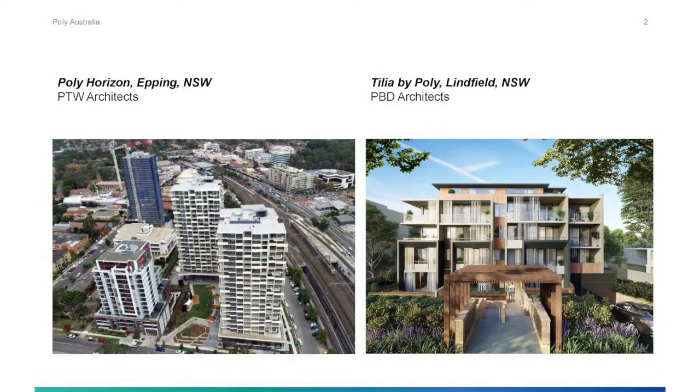Completed in Sydney, we've got a project at Epping and a project at Lindfield. Epping is complete, and Lindfield is currently under construction. We've also got several projects in Melbourne, one of which is the very exciting 1000 La Trobe Street, which is another commercial building that'll be built. It's in the planning process, along with Summit at Doncaster, and one of our completed projects, Claremont Manor in South Yarra, Melbourne. But globally, we have a lot of experience in commercial real estate.

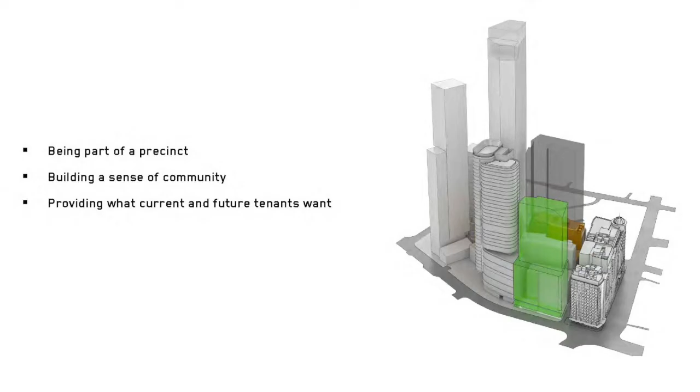By targeted workplace, we saw the building as being part of a precinct, an ever-changing part of the city with a multitude of commercial opportunities for clients to tap into. We saw this building as fitting into a community, but also providing a unique identity to the current tenants and to the future needs of this ever-changing, ever-adapting workplace and commercial structure we find ourselves in today.

Health and well-being we placed at the central core of our ideas. With that, we decided to move the core of the building from the reference scheme. That allowed us to put people near light, making people use the edge of the building, allowing for light and views out to the city, and really allowing the majority of your day to be spent near a window, which is a very simple move.

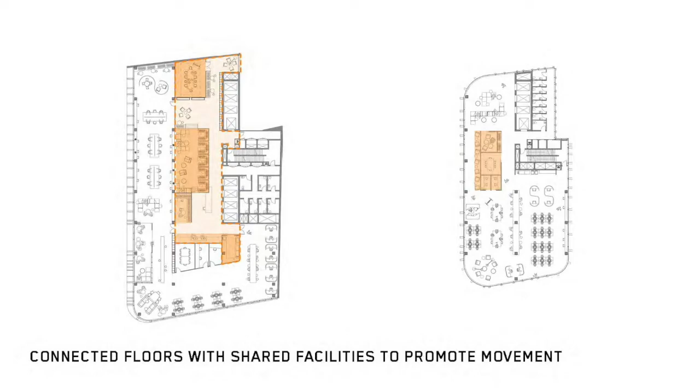That also meant that within the central part of the floor plate, you were able to provide something that interconnected floors and provided a space so it can engage with different levels and different meeting spaces. This allowed the building to be used by one tenant and have interdependency, or it can be used by a multitude of tenants, allowing individual people to use shared spaces, but then also to all come together as one organization into common spaces.

We wanted to provide all of the tenants with unique opportunities to use external zones. So within the carving of the form and the landscape elements, we provided a variety of environments so that if you were on a specific floor plate, you can use an external space adjacent to your space, but you can also go to spaces further up the tower.

Rather than providing cut and paste floor slabs, at the podium we've got winter gardens, which are predominantly owned by the people within those spaces. Then you've got levels 9, 10, and 11, which are external larger spaces that allow the internal community to use and adopt, but also allow a breakdown of scale to offer to the city.

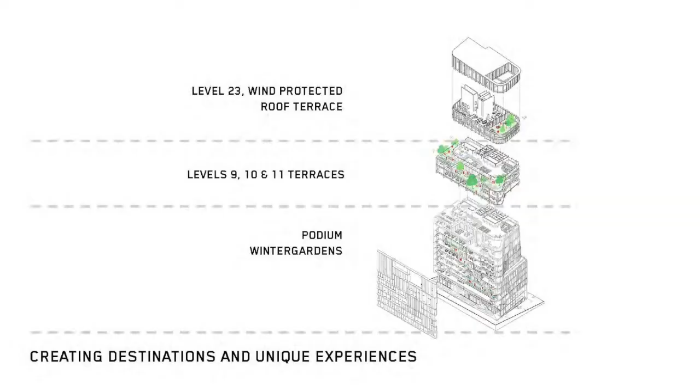We also provided a rooftop garden, and the whole idea behind all of these clusters of spaces was allowing unique experiences, so you'd hope the building would be used in a way where you can travel up the building and go to a destination, creating a variety of community neighborhoods and destination planning.

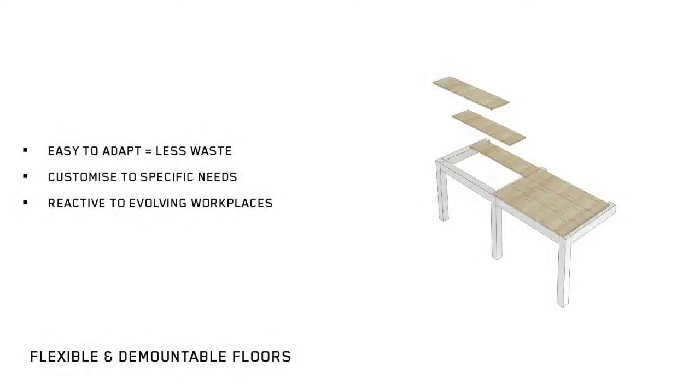We felt that the future commercial market is evolving and is not in place yet. We don't know what's going to happen in the future, so something that looks easy to adapt and produces less waste, so you're able to easily remove parts of floor plates to adapt your space over time and allow for future tenant needs.

It also meant a very practical consideration, so we were talking with the engineers early on. We had two rail lines under the site, and we said, how can we get the building as light as possible, to hopefully, once we get into more detailed research, keep that lightness over the tunnels and make it easier to construct. So we had concrete up until the second level, and then a timber frame structure up to the top, which I think was actually one of the downfalls of the scheme.

We made it an early decision to say we're going to do that, we're going to go for it. But then, in retrospect, maybe not the right idea.

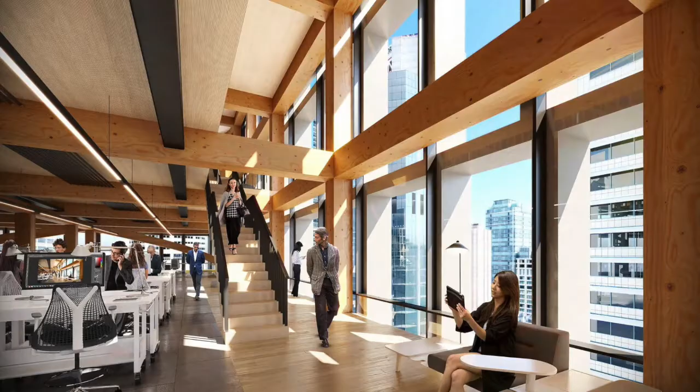And this is one of the spaces which shows a glulam structure and a very definite structural solution.

Traditionally, towers have been working as walls and voids of spaces in urban fabric, disconnected from the urban activity. So what we decided to do was go in an unconventional way, and try to humanize the scale and continue the urban flow in our proposal.

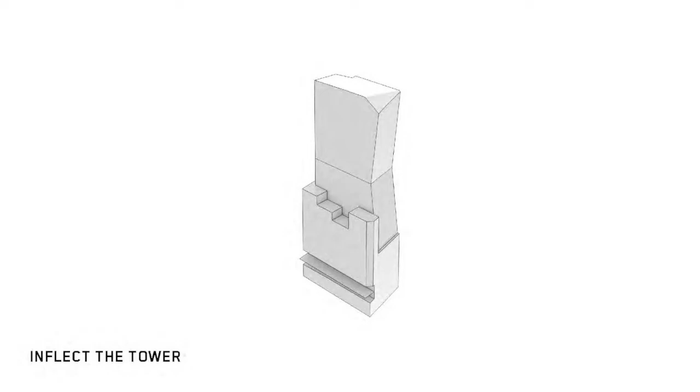To do that, we started breaking down the scale by introducing pockets of green spaces while keeping the existing street datums, both on Grosvenor Street and George Street, and introduced an inflection in the geometry of the tower as a waist that opens up the street to the solar access and maximizes the daylight factor and sky view factor on the street.

And then, of course, responding to the legislative rules, like the solar access plane and height control, and finally smoothing it up with curved edges to bring back a bit of that familiar Sydney feeling that you get when you're walking around Circular Quay.

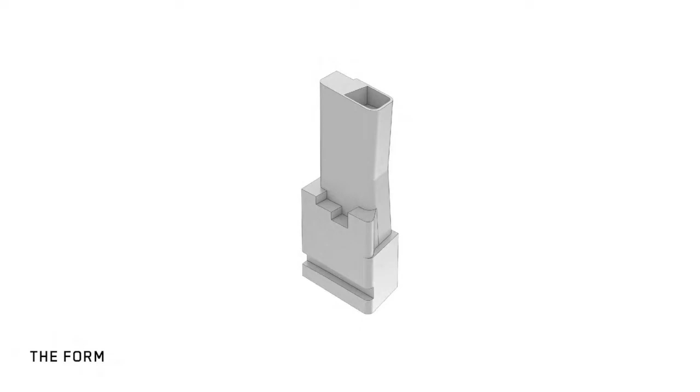This is the final geometry with its carved out bits of green spaces. This is the final proposal that, in our view, provides a boutique workplace that is connected, not disconnected from the urban activities on the street, connecting the workplaces with urban street activity through interstitial interactional zones that we introduced as green pockets.

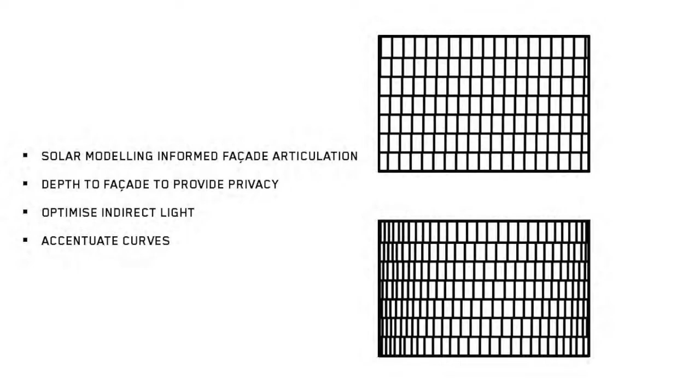Besides the geometry itself, the facade also responds and connects to the urban activity through the green pockets, and also responds to environmental factors by opening up in the middle and closing down on the edges to maximize the daylight factor on the workplace. With limited variations of depth for the fins, we respond to the direction of the solar.

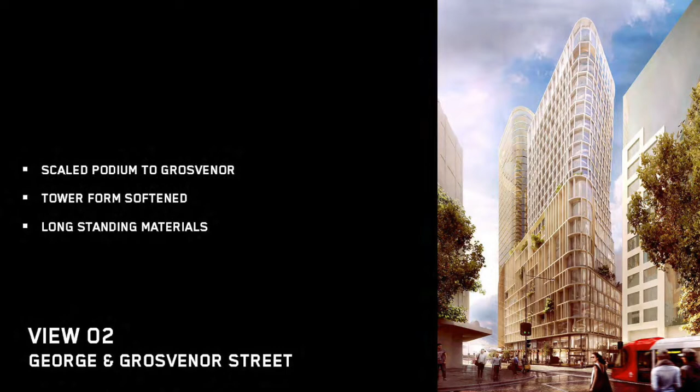Besides that, we thought it's a good idea to keep authentic Sydney materials, such as sandstone on the podium and GRC on the top. And as I mentioned before, the inflection in the tower opens up the view to the sky and also solar access at the ground level.

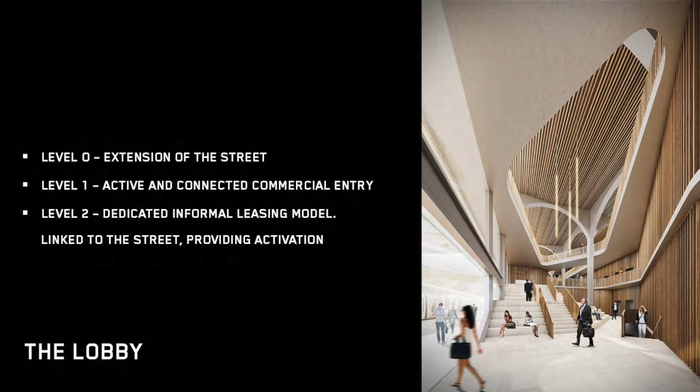You can see the green spaces breaking down the scale. There's a normal elevation, so when you get to the lobby, you don't face a conventional lift lobby with a bunch of lifts in front of you, but you start to interact with 3 levels of different activities, including retail on the ground, commercial entries on level 1, and informal co-working spaces on level 2. You can see a typical view from level 2 and interaction with the public activity on the ground.

That was our proposal, short and quick. I hope you guys liked it.

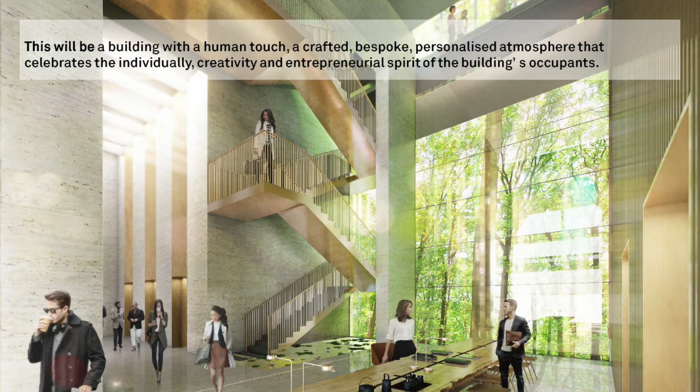We really wanted it to feel like it was operating as a fine hotel, and our proposal really sought to be an individualist in what we saw as a conforming office market, really tapping into a deep pool of tenants whose needs we felt are currently quite poorly met. It's elegant, sophisticated, and it delivers significant commercial and public benefit.

I'm going to take you through 3 key spatial moves that really underpin our proposal and unlock the environmental, commercial and design potential for the 210 George Street site. These 3 key moves are: locating the core to the north, shifting floor space high within the envelope, and setting the building back to the east and the south.

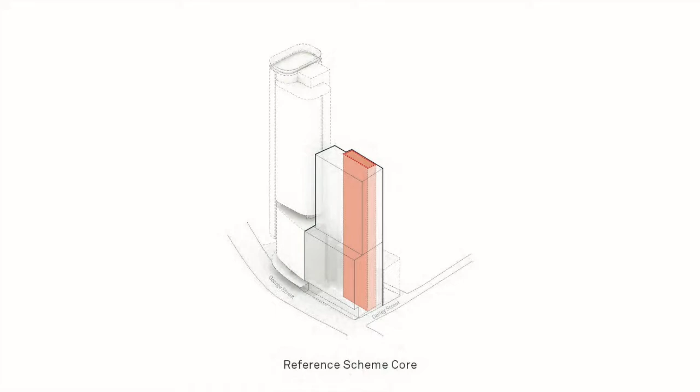For those not familiar, the reference scheme placed the core on the east. At Hassell we like to explore possibilities through our design process, and fundamental to a successful office building is a well-placed core and its impact on the ground plane. Through careful consideration, we moved the core to the north, as we saw significant benefits.

The first benefit is increased natural daylight. By moving the core to the north, we were able to free up 80% of the facade with glazing. That meant 100% of the workplace was within 12 metres of the facade, creating excellent natural daylight and a high quality space. Moving the core to the north also meant we could release expansive views from the main floor plate itself.

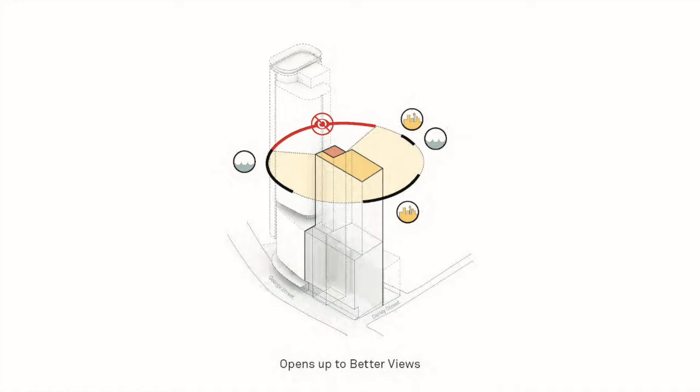With 200 George Street and Lendlease Circular Quay Towers in close proximity to the north, there was limited access to views. So from the floor plate itself, we were able to capture views to the west towards the Western Harbour and Barangaroo, to the south the city skyline, and to the east towards the Botanic Gardens.

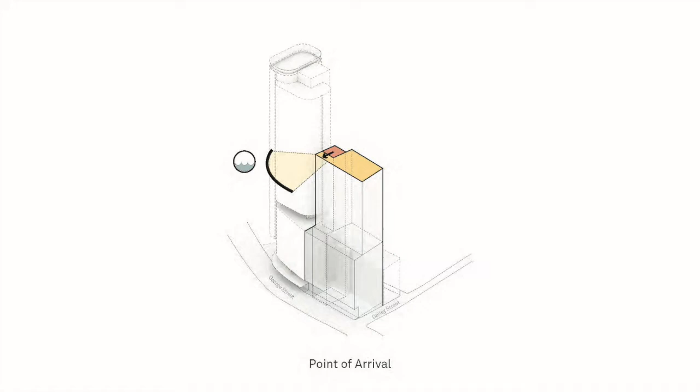The northern core also created the opportunity for a distinct point of arrival. Rather than the core being buried deep within the floor plate, we were able to place it close to the perimeter, meaning it benefits from good daylight and views upon arrival on a typical floor.

The distinct point of arrival also worked for us, as it didn't interrupt the main workspace itself. The main workspace remained regular, efficient and flexible, aimed to attract a diversity of tenants.

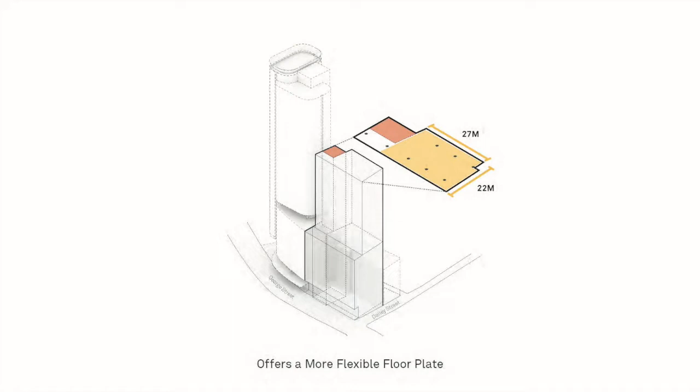Our second key and big move was to move floor space high within the envelope. We effectively narrowed the lower section of the building to the east between our site and 4 Dalley Street to create a gap.

This firstly pushed valuable lettable area high within the envelope, which we know is a great challenge with the City of Sydney competitions, to unlock the greatest potential out of the envelope. But for me, the biggest benefit was that it created incredible public benefit: a new laneway behind the site that connected directly into the APDG laneway network.

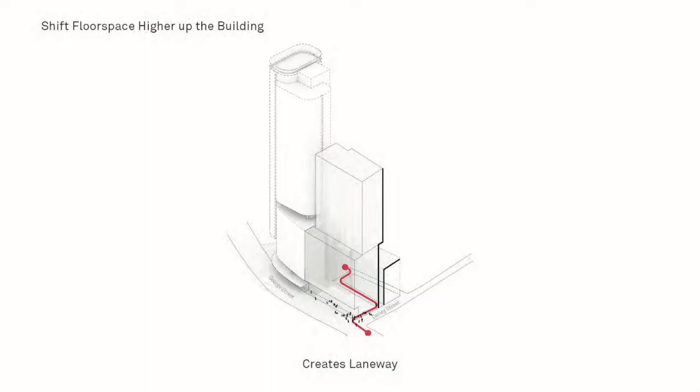It also opened opportunity for new retail and entertainment spaces at the lower levels, adding activation and cultural character to the precinct, as well as natural light to the lower levels of the podium, again creating a really high quality workspace.

Our third big move is to set the building back on the southern edge, to create a building with a strong presence, articulation and amenity.

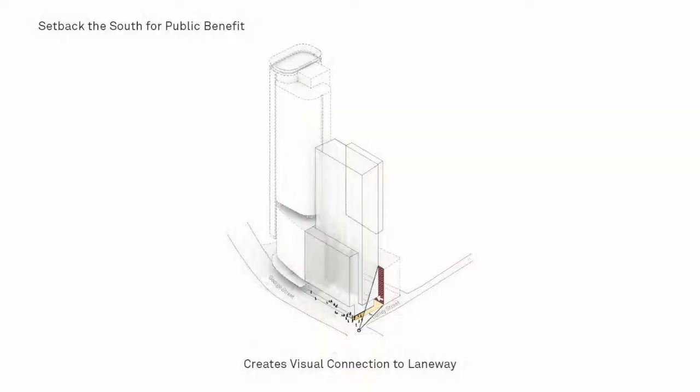It provided pedestrian amenity by widening the footpath for safety and activation. It also created stronger visual connections into the laneway, which is particularly important as we hark back to recognise what this area once was in early settlement: a tiny warren of laneways and courtyards.

I thought it would be really interesting to reinstate some of that. It also announces the APDG block from the south.

Formally, it emphasises the verticality of the tower as a very elegant and memorable form, without compromising the engagement with the ground plane.

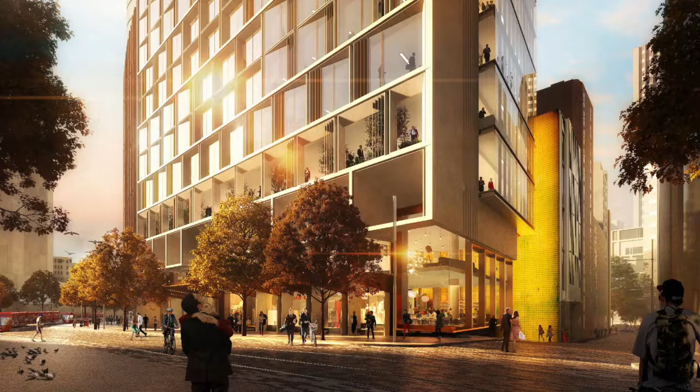So these 3 key moves - moving the core to the north, shifting floor space high within the envelope, and setting the building back to the east and south - were the key moves that unlock significant commercial and public benefit.

Historically and culturally, this is a place that has significant meaning for many hundreds of years. And it's a really exciting time in Sydney, particularly on George Street, which is undergoing rapid change to become Sydney's premier street, a pedestrian and light rail enabled boulevard.

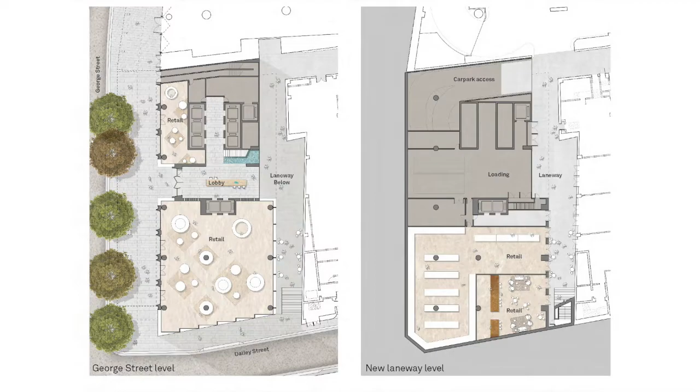For us, it was incredibly important to place the commercial lobby off George Street, to create a clear, identifiable address intrinsically located with its surroundings, rather than the reference scheme, which placed it on the corner with options to place it off Dalley Street.

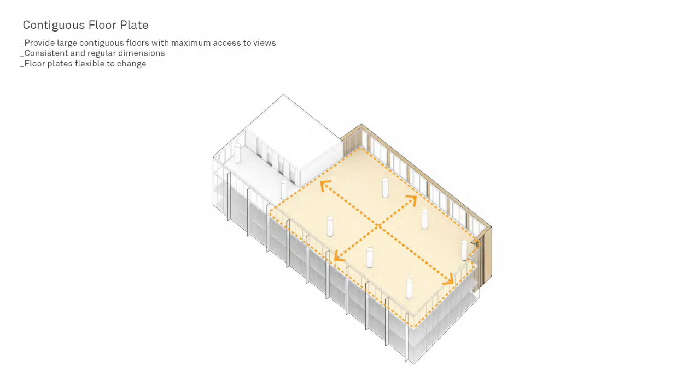As I mentioned, creating a high quality workplace was important. We created a really regular, efficient floor plate with an efficient structural solution. The columns were placed inboard to free up the perimeter, but they also allowed us to place voids either in the centre or on the perimeter to effectively connect multiple floors and create vertical villages.

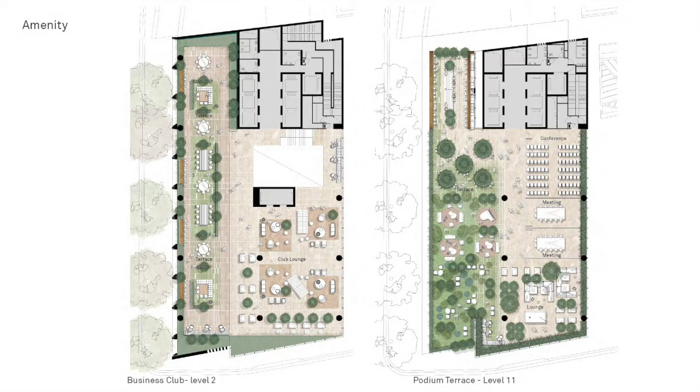As you can see from this render, it illustrates multiple floors connected on the perimeter and also experiencing great natural light and views. One of the most exciting parts of the scheme for me was the shared terraces. We had 3 over our building, and you can see just 2 here, 1 on level 2 and 1 on 11. We really wanted it to blend inspiration from the best offices, luxury hotels and business clubs to provide environments that open out onto George Street.

And these could be used for individual work, conferences, socialising, meeting, and of course entertaining. And they could also be shared spaces, so tenants don't have to fit them out as part of their fit out. The facade language extends the historic grain of the city and has a slender tower above that we feel reflects the aspiration and elegance of a contemporary city.

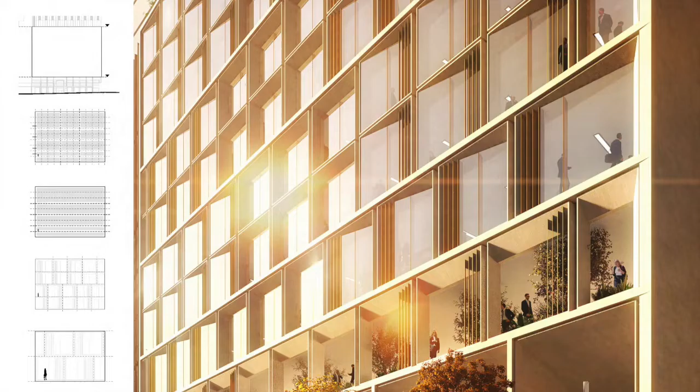At podium level, we were keen to create a facade that broke down the homogenous identity usually associated with commercial buildings and create a more human scale and individuality. As you can see from this elevation, we really carefully considered the scale, proportion, rhythm and materiality of the facade and how it complemented the neighbouring buildings, yet had its own unique identity.

This is the view from the east, and it comes together as a series of interlocking volumes. To the elevation, we feel it's distinctive, powerful, yet respectful. So this is our proposal, the next generation workplace that's authentic, comfortable, flexible, and most importantly, connected to its city.

It's been a pleasure to present my proposal tonight, and just before I conclude, I would really like to thank our engineering partners, NDY, Integral, Enstruct and Surface, many of who are here tonight. We're really proud to share this with you all. Thank you.

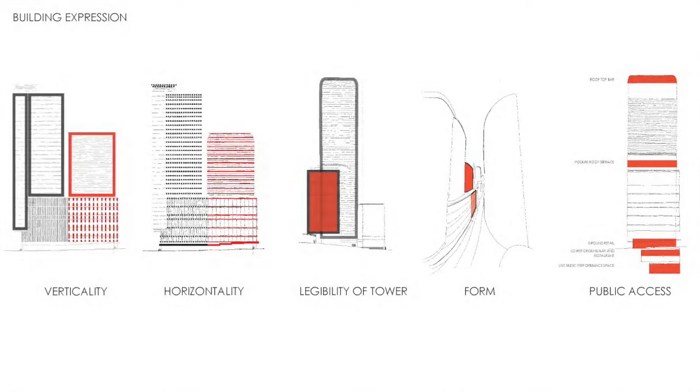So we sought to do that both at the bottom, realizing opportunities in what was the car park - existing buildings on the site when they come down offer up a hole, and how do we fill that back efficiently - and then working our way up to a rooftop bar.

You have to have a rooftop bar. That's just, you've got to do a rooftop bar.

So for us, we ended up with what we consider to be a simple, elegant building, one that behaves itself in the street. As I said, when we got the final renders through, we were thinking, have we behaved ourselves a bit too much? This is a competition, you have to try and win them, but it is a very significant context to sit a building next to, and we feel we developed a building with enough of its own personality, while still sitting respectfully in George Street, really being a street wall.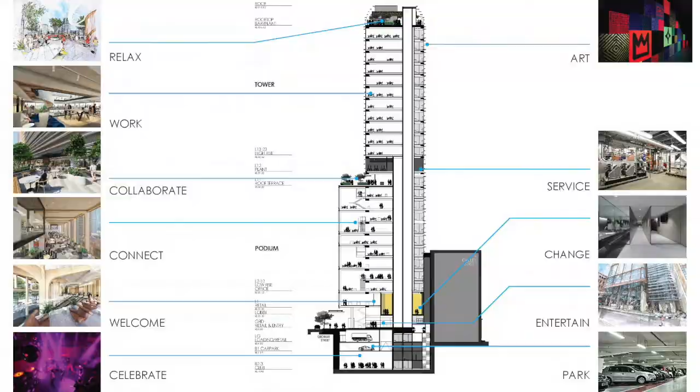Dead space in the rear, adjacent to the existing building behind, is used for end-of-trip facilities. Then the office arrangements in the podium and in the tower, which I'll go into in a minute, and, as everybody probably will, a roof terrace. We moved the plant into the center of the building, which freed up our capacity to have our rooftop bar.

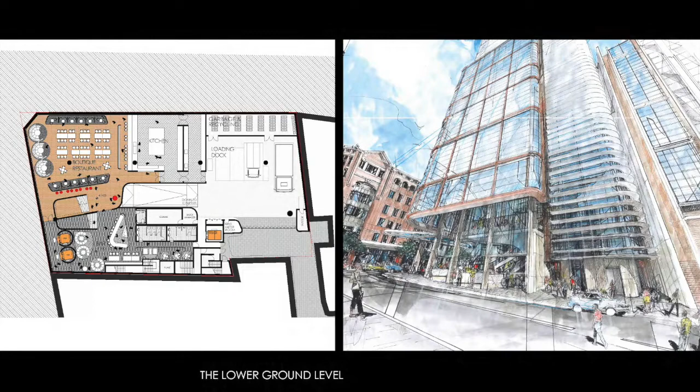So then working our way - I'll go down and then up. From the corner, we maintained - again, we were probably behaving a bit too much with the rules - so we left the entry condition on the corner, we left the core to the rear, but we lifted it up to level 1, so you came in at ground and went straight up. That freed up space along Dalley Street, to go down and create space below ground, which we then utilized as a restaurant and a bar.

We also squeezed in the loading dock to the rear, coming off the shared way with 200 George next door, and then down to a floor of car park that sits between this floor and the bottom floor, which we use as a venue.

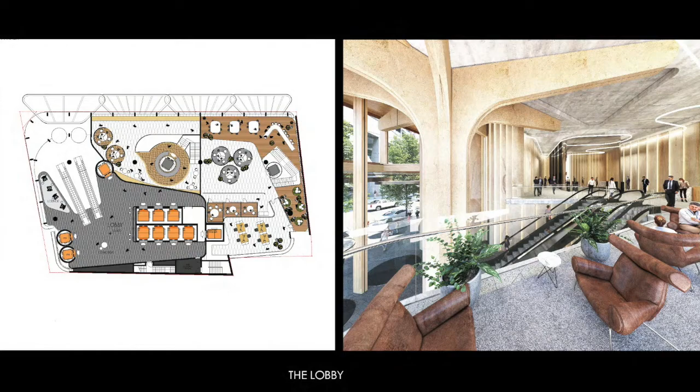The lift core is a pretty interesting configuration in itself. So you come up to level 1, a pair of escalators into a really simple volume that describes the two structural solutions, the timber to the front and the concrete to the rear, which has a commanding position over the street on George Street, and offers something of a commanding position to the lobby.

Then you come up to the podium, you start to see how the lifts, which we placed to the east, the lift core opens directly onto the floor plate. The lifts are back to back - I'll explain how that works in a sec. The volume really is dominated by this veranda space or winter garden that runs the full length of the George Street elevation, describing the office space here as a series of 2-story villages with about 2,000 square meters, which, given the site is a little over 1,100, was a pretty good outcome.

The other advantage of placing the core where we have is all of the amenities - we all go to the bathroom - are all on the window. When you use the staircases as interconnection, they've all got a window as well. So all aspects of the floor plate, not just the office space, get access to natural light and views.

Then on top of that, the roof terrace, and again, probably similar to others, the strategy here being a shared space for access to outside.

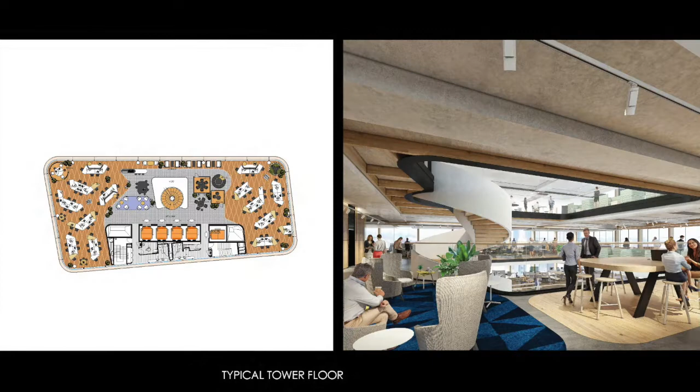The plant room, as I said, we placed above that space, which allows this bank of lifts, the low-rise bank, to drop off. And then when you come to the next floor, the high-rise bank, you get quite a thin element of core with light coming through from the rear, and then access to glass the whole way around. The center of that floor plate in the tower is about a 630 square meter floor plate, so it's pretty small. We provided a soft zone in timber in the middle of the concrete structure, allowing for interconnection and for that to be handled in a much more efficient fashion.

And then, as I said, you have to have a rooftop bar, so the only thing that we put up here was cooling towers, in effect, and then that gave us the opportunity to have somewhere to go on a Friday night.

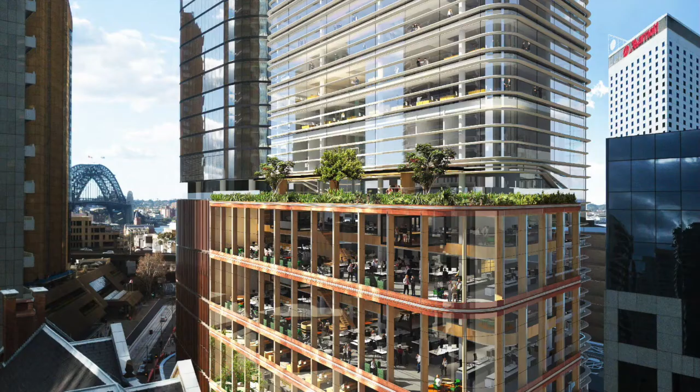Architecturally, what that splits down into then is two components. So from a fenestration point of view, we've got a podium element in terracotta and timber being the real hero, and above that a tower element in white terracotta and a lot of glass. The brief called for the tower to not read as a glazed volume, and from the street it doesn't, but obviously from within the office plate it does.

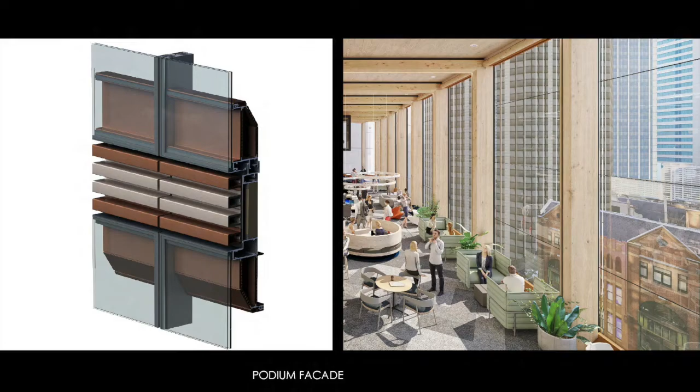So to the podium then, one of the things we realized when we ran a sun study was the podium doesn't receive an awful lot of direct sunlight. We took a bit of a risk and said, well, therefore we can have a large clear glass facade. And when I say large, the facade panels work out at about 2 stories high, so about 8 meters in height, and the structural grid on the timber is 4 meters. So you get these really large, expansive views out to the street, and really the office becomes part of the street, and the character of those two spaces come together.

The heritage buildings opposite, the brick and sandstone, gave rise to the fenestration in the facade in the spandrel zone in terracotta. And then jumping up to the tower, we went away from the standard kind of 1,500 module of facade and sought to go for about a 4 meter wide by half-height on a floor glass panel, stacking 2 of those on top of each other, so you get a very broad, expansive horizontal view, which again, given it was only a 600 square meter plate, really connected the interior and exterior spaces quite well.

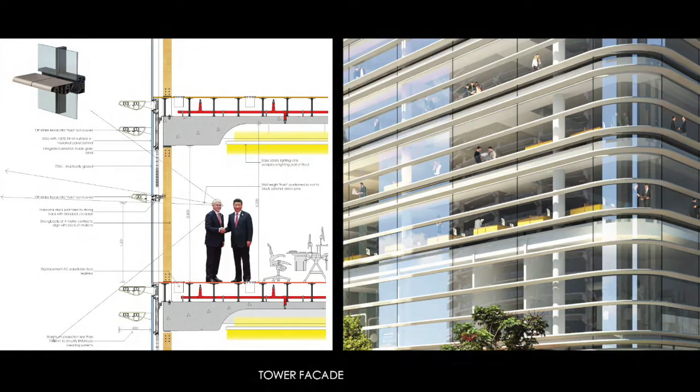The sun shading on the outside then gives the building, the volume, its form. He was important, he's probably less so now, but at the time of the competition, that was a culturally relevant thing to do.

And so that's us, a contextual building that really brought to the fore timber as a material, both in the podium and in the tower, an elegant and simple solution in our view. Thanks very much.

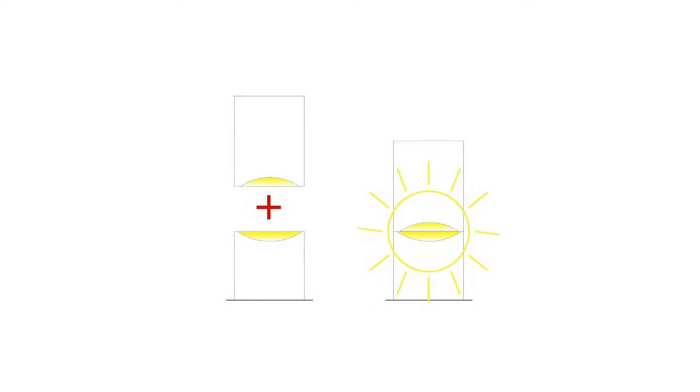So the real issue then, once you've separated those things, is how do you join them? And that's how we've done it. So you've got the CBA, Commonwealth Bank of Australia, so you can see quite distinctively that there are these three types, and I'll go into that in a little more detail.

I think for us, the real problem in Sydney is that it's become kind of like any other generic skyline. This competition was a way of thinking about the ideas that surround that. In our building, we thought it would be quite a beautiful idea to start to reference quite directly those incredible Sydney buildings. So you can see all the parts that have been embedded into our model, and that they acknowledge all those beautiful buildings that have contributed to Sydney, so that the building itself is almost like a capture of those ideas instead of just being a rootless individual. I think in some ways you've seen the buildings that all this heroic individualism leads to are in the end kind of more or less the same.

So we did think, what was it like to be a good neighbor that was appreciative and considerate and courteous.

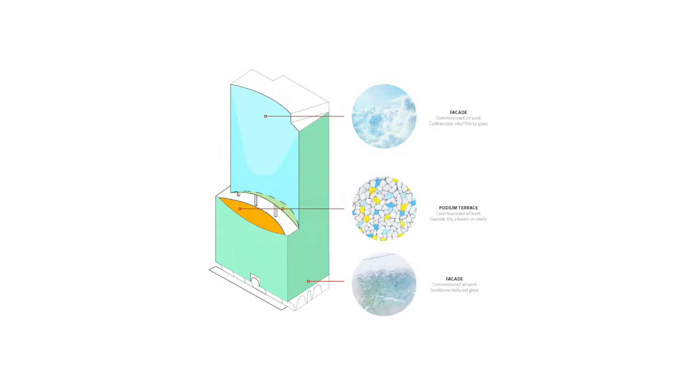This is the next idea: the risks and rewards of new materials, which every competition we undertake sort of leads us down some weird path. In a funny way, this was kind of the weirdest one we went to. But you can see that at the top, we loved the idea of a glass building that appears incredibly solid. So the top building is just this sort of plate glass image of sky. Then there's the connecting pieces that are tiled, and then there's the base, so that's the sky, and that's the side where you can start to see the base crawling up. We did think, what would it be like if you took sandstone, like those incredible buildings just around the corner, and started to transform that into glass?

So what we did was we actually worked with an artist in Canberra to make these big pieces of glass that were modeled exactly on pieces of stone. You can see here how they were, and then eventually they would be stacked together, and that's how the facade would start to look at the base. Believe it or not, it was a really simple system. The glass could be sourced, funnily enough, in America, and then there were various panels that could be locked together to make up this glass stone base.

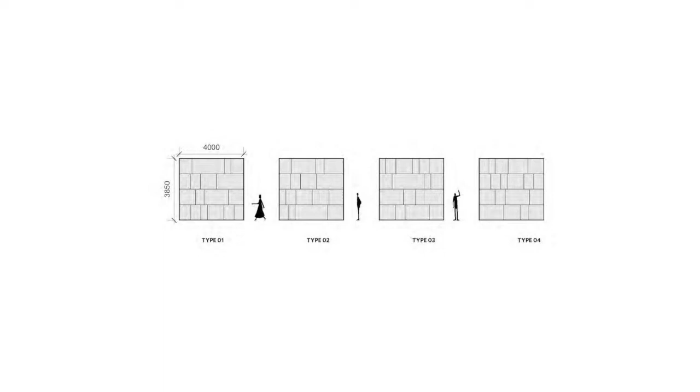You can sort of see there.

The final thing is, I think that's something in the office that we really struggle with—these competitions are kind of a masochistic endeavor. And at some point they do lead to this architectural suicide where you're white-anting your own profession by this incredible amount of work you're supposed to deliver for these.

And we thought for this one, what would it be like if we could just deliver a project that was really about hand-drawing perspectives? In other words, we forgot about all those people in Paris and London and wherever, and said, can we just do these presentations on our iPad?

So this is kind of the drawings that we actually presented for the competition, which tries to show as clearly as possible the idea of the building, because there's a huge leap between what's supported at the beginning of a project and what actually gets built. But if the idea is strong enough, then that will just stay intact.

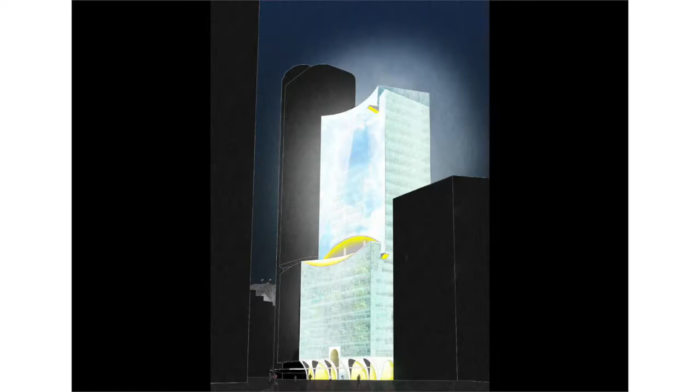And then we loved the idea of this balcony where people could go and have these metaphysical conversations. And that's it.

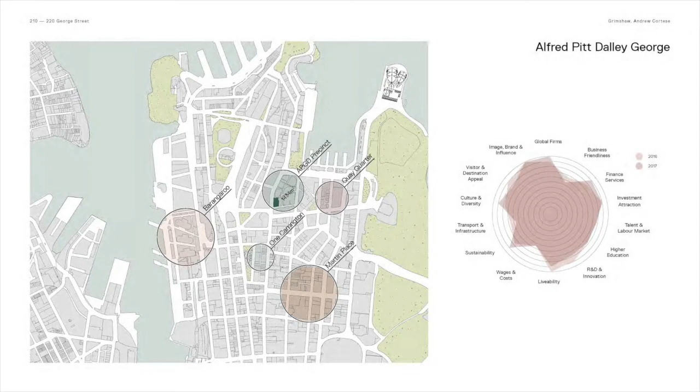And this building faced west. It's 28 stories, very small floor plates, no views or just little snippets of views, at a junction. It's part of a great precinct, but in terms of its attributes, I think Mirvac sold it to Poly, and then of course it wasn't seen as strategic to them. So you say, well, how do we make this really meaningful to the client? How do we make it meaningful to the city? How do we make it profitable? Because it's a really challenging building for a commercial development.

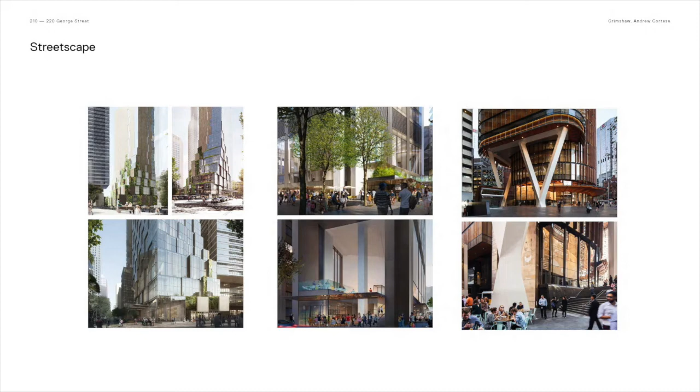And of course, the APDG precinct has got these heroic buildings from all the notable architects. And the thing about it is that when you're making the opportunity to make a new precinct, all of these buildings come down as kind of individual buildings which then try to assemble a place-making agenda. And I find that quite insincere and quite devoid of any intent for what Sydney is. Obviously the city tries to mediate what our place is and what our city is, but it's the responsibility of owners and architects to collaborate and figure out that conversation between the past and the future.

And then on the inside, despite the ambition of our competitions, we always get these kind of value-managed outcomes where you get this sterilised generic space, promoted on views and light and flexibility and all that sort of stuff that we all know. But at the end of it, that's what you're being delivered.

And I consider that to be completely contrary to what people want and what people need to invest in. From a sustainability point of view, there's complete redundancy and wastefulness in what we do. So why don't we just design buildings that people want to be in?

So this is what we were. We started off as a studio in Hickson Road, just across the road here, in this great 2-story space. We had no views because the windows were higher than view height, but they let in an enormous amount of sun. The volume was great. It was hardly air conditioned. It leaked air, it leaked water, but the brick was there, the height was there, the volume was there.

It had mezzanines, and it was just a wonderful place to be in. Then we moved to our office in 333 George Street, and we just made this great place along the edge so that you could stand in these big 4-metre windows and look into George Street.

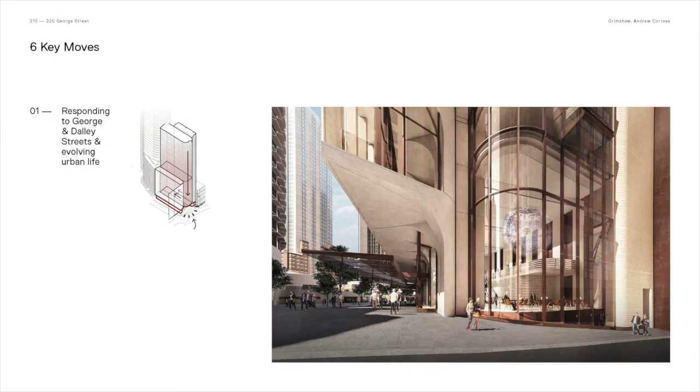So an entry on a corner. I know you can move away from it, but that's what we did.

But a compositional place - this idea of using structure to give architectural place. We love structure. We sit in this building here, this great wharf, and what makes it so rich is the structure made of material, and then you make place within it. And you say, well, why can't we do that? Just allow the layering of a facade which reveals structure, like James Barnet, and you just allow people to walk out and experience that structure. So why can't we do a building like that?

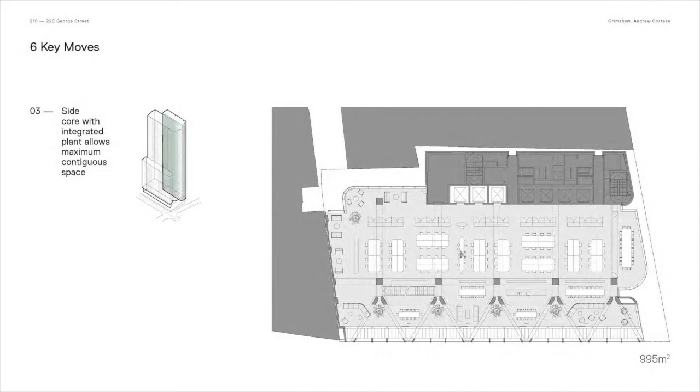The next one was the side core. We can do this in many ways, but it's just like getting the most compact core, which just allowed the space to be as contiguous and enjoyable.

The city is kind of infected by this need for podiums, and everything has to be a podium to make it human scale. And you go, well, I've been to many cities where, just in New York, you walk down two streets which are 20 metres apart, and they're 24 metres tall, and it's the most amazing human experience. So I don't know what human scale actually is, but I just know that we keep on using it as a device to actually reinforce a more scenographic intent, which is not necessarily genuine.

So the idea here is that rather than express a horizontal demarcation of the city, just allow the building to find its most elegant expression. Acknowledge the horizontal datums, but don't make that the priority or the justification.

And then, double height spaces that we all want to be in. You want to be in light, you want to step outside, you want to feel a material, you want to feel the scale which is different to what you are as a human.

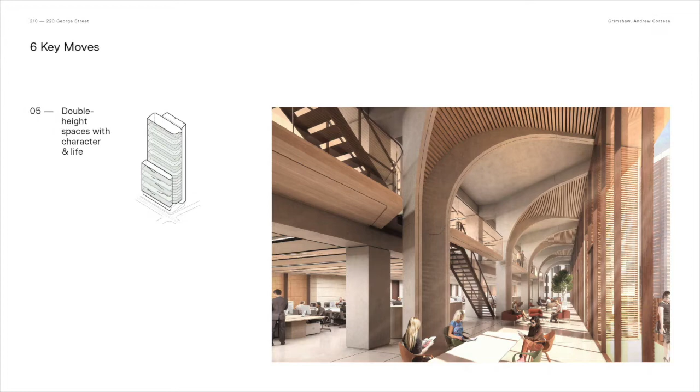You want to have places where you can work together, and places where you can meet together, and places where you can look into all that sort of interaction and connectivity, which gives a richer human experience. But why can't we do that in a base building rather than have it as something we have to make? Because I'm sure from our client's perspective, if you make something really wonderful to be in, people will pay more to be in that space.

And of course, we love spaces at all different levels of the building, in the middle and the top. We always refer to the Opera House as some kind of intent, so the building comes like that. It's similar to Fitzpatrick's. We had the double height spaces because somehow Graham allowed a building which had a bigger envelope than the GFA.

So he said, oh great, this is fine, no, we don't have to build to an envelope. So we started playing with these great double height spaces on the lower part of the building.

Being in our building at 333 George, we got the cheapest floor. We moved in, we did our studio up, and then we made the cheapest floor the most valuable floor for Charter Hall. So they said, why don't we actually put more money into making the lower parts of our building engage with place. So that was the idea here.

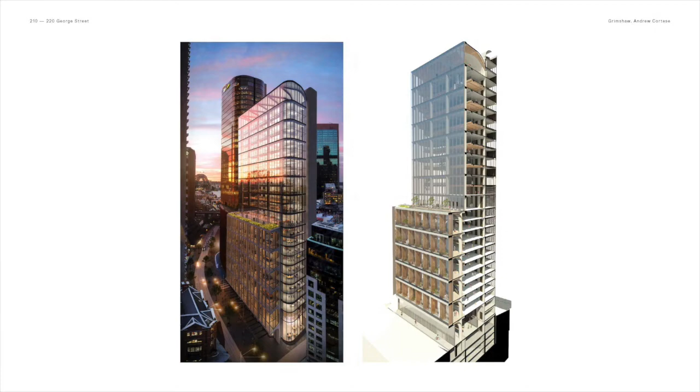And then the building, the smaller footplates up the top, we just allowed them to couple together. So low-rise, the great kind of arching spaces, column-free, cantilevered spaces which look out onto the street and capture light, the western light, which you enjoy and embrace in Sydney.

So if you couple two together with a mezzanine, you get a 1700 or you can get a 700. So in terms of multiple tenancies, co-working tenancies or single tenants, it actually gives you that flexibility. And then you begin to get spaces like this, which are delivered to the tenant as a base building provision.

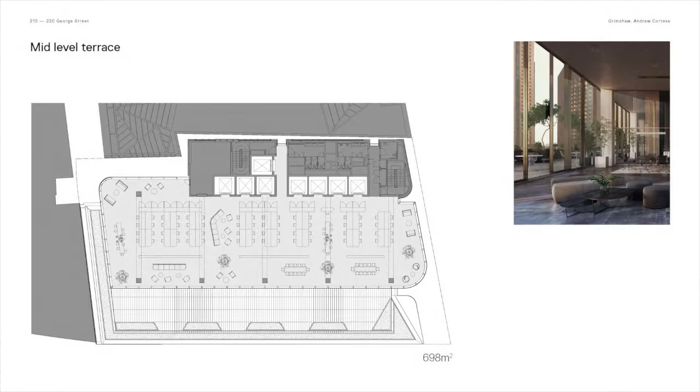And again, like everyone else, the mid-level terrace, Sydney's great climate, just get outside and get a place of prospect. But also a place to engage back into the scale of the building.

And of course, the ground plane is continuity into the ADP, but making a really interesting retail and public realm. Again, it's small footprint, you can't do too much, so just make it as kind of an intense experience as you walk past it, knowing that you're part of an ensemble. So how do we kind of give you a sense of that continuity?

So this is the idea, these arching cantilevered forms, which of course we had to increase the footpath, so the structural, very simple structure had to go back, so use that as a cantilever, which then captures these balconies with the sandstone blades as an element, and then we have the simple glass tower with the curved corners, and then we do a beautiful precast concrete core to the rear.

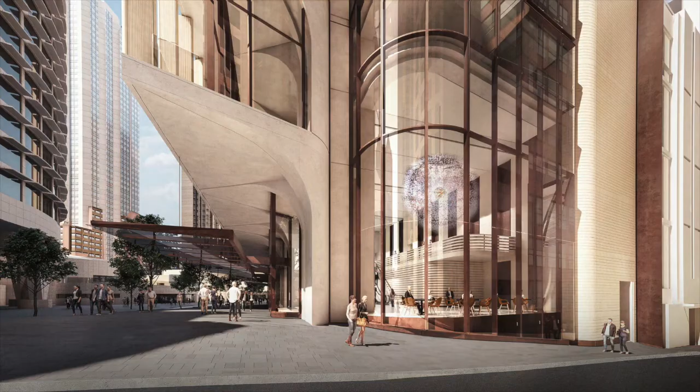And then you start to enable this vocabulary. It's all precast, it's all in situ, it's built with the same kind of economies as any other building. I'll go through this quickly.

And front on, you can see the retail moving through, looking up into the buildings, and this is this kind of relationship between 200 George and the Grosvenor. So you can see it's something which is kind of talking through different histories and different times, but the nuances are there, and the visual kind of interest is provoked.

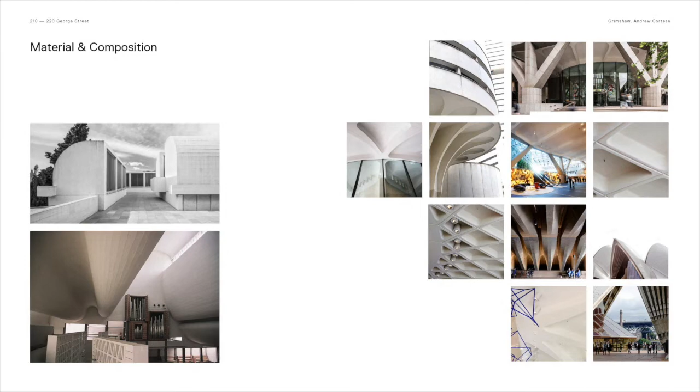And of course, again, understanding how Sydney's contrasting light falls on materials makes it a great interest for us. So we've explored the building with these beautiful models, again, a facade made from space and structure and the layering of its experience.

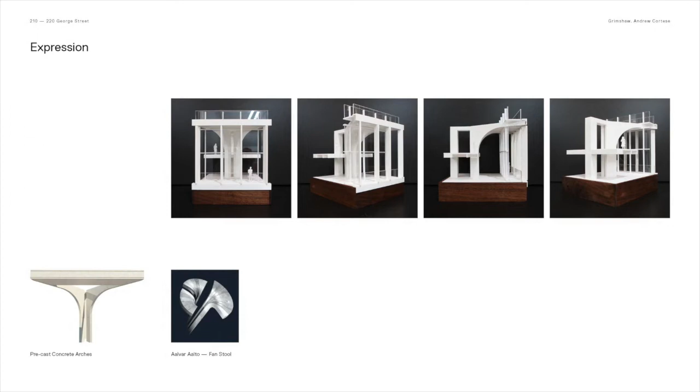Going back to all those cues, if someone's done something really well, look at it and see how you can evolve it. Those fan stools by Aalto, we always loved that cantilevering arch. So that was the idea of how to take a cantilevering structure out and looking forward like this.

And that's looking straight back in at that experience of the workplace. The building in its entirety on front, which is transparent but with a layering facade, captures different materiality, the solidity, the acid washing, the transparency, and the curves begin to have that association with Utzon, with Seidler, with some of the 20th century movement of form and light and atmosphere that gives a sensibility of what Sydney architecture is. Thank you.

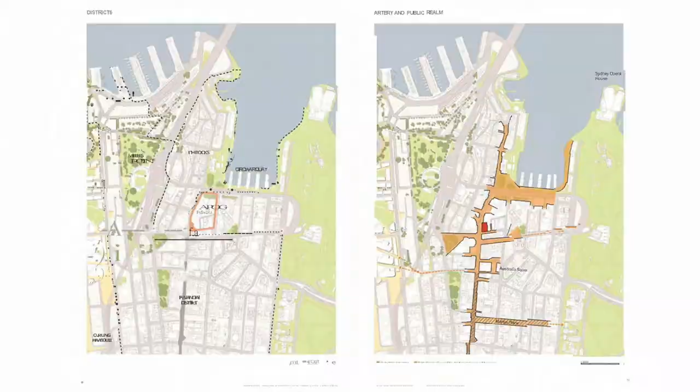There's a lot going on in terms of the transformation of the public domain in Sydney as well. I can't recall a time of more change. Again, our site is a significant moment along the George Street spine of the city, and that contributes to our view of the role it plays in the structure of the city.

The way we approach pretty much all of our work, whether it's urban design, master planning, or architecture, is to establish a series of guiding principles. These principles are our goalposts that guide the team through all stages, particularly when working between international and local teams, so everyone is on the same page working toward a common goal. Celebrating Sydney's public realm is very important, particularly with this site's location on George Street and at a difficult corner to a very minor, almost laneway-like space, connected both to the city, within the building, vertically, horizontally, in all aspects.

A smarter workplace, facilitating the kinds of spaces that we're in tonight with interaction, social space, workspace across multiple floors in a social and professional environment.

Next generation building performance. We won't go into a lot of detail on this tonight, but the way the building is designed, particularly with its high performance glazing system, structural engineering system, MEP systems, has the ability to reduce the building's impact on its environment and also create a more healthy and well environment for human habitation.

And iconic - SOM and Poly have a long standing relationship working with each other, particularly in China. We've become accustomed to creating buildings that really stand out and celebrate what Poly is about, but also reflect SOM's unique approach to the synthesis of structural engineering and architecture.

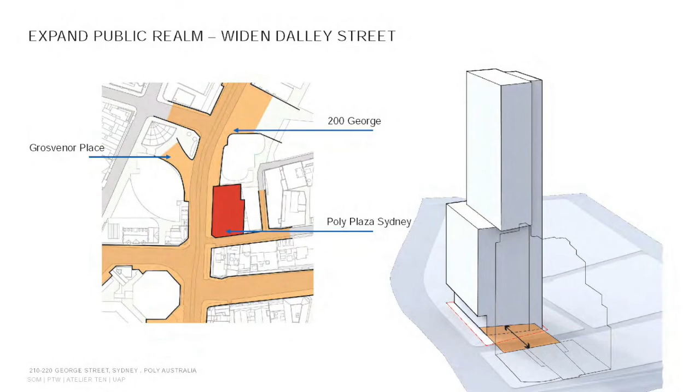Our scheme pulls away from Dalley Street corner. It sets back in order to think about Dalley Street and its future transformation. It's a pretty challenging street, doesn't have a lot of presence, doesn't have a lot of life. We felt that pulling away, creating setback, would create an opportunity for both building entry, but also longer term, creating a catalyst for longer term transformation with future development further east.

So primary address is still George Street, but a second entry is provided by that setback with a staircase up to a ground floor lobby.

But the main building lobby is elevated. It's raised up to provide overlook onto an occupiable balcony that looks over George Street and is shared with commercial space. And you may be asking, what's the ground floor all about?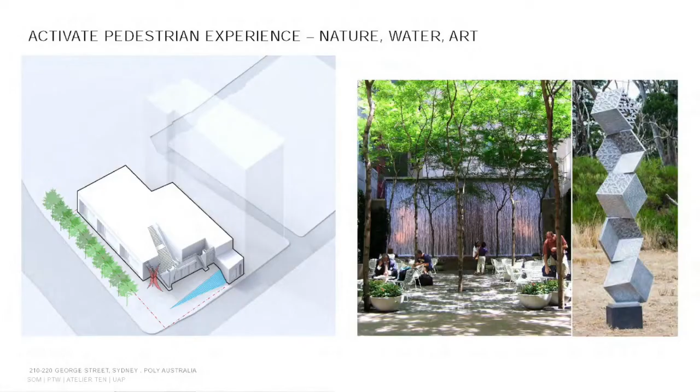In our scheme, we maintained a primarily commercial ground floor, activating George Street, providing continuity of active interface to that important transit corridor. Bringing nature into the site, continuation of the streetscape, creation of opportunities for art, vertical surfaces covered not just by landscape but also by water features. All of these things kind of create a more memorable entry and address and add value to the scheme in our belief.

Like many schemes, we have a public terrace, but in fact our public terrace is kind of unique. It created an opportunity for an art program, which I'll explain a little further a little bit later, which is very much in line with Poly's national or international goal for repatriating art to China. So we would use that space as an exhibition space for their very substantial art collection.

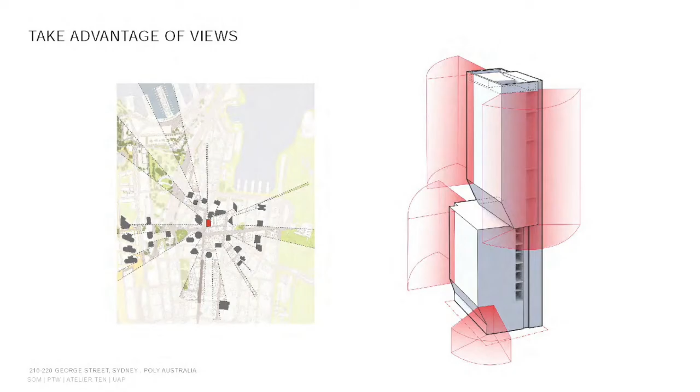Views from the site, of course we've all seen view analysis, but what we felt was important was to understand that these views are not panoramic. They're framed, they're targeted, they're focused to very specific locations. So the way in which the building responds, in our view, was to maximize those western, northern, and southern views by positioning the core to the east.

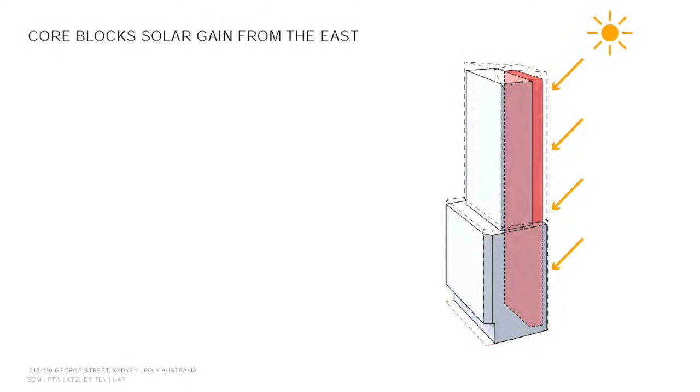We provide inter-floor atria, creating more connectivity to create more flexibility between single-tenanted and multi-tenanted floors. The core on the east absorbs the solar gain that you may get, particularly in the late mornings, but also maximizes the space for views and minimizes travel distances from the core to the perimeter, rather than having a long travel distance if the core was at the north.

We went kind of hard at the structural solution for this scheme. We took a lot of effort to look at both the efficiency system of the facade that would allow for transfer of loads from upper floors down through the podium levels to ground, but also to create a more synergistic relationship between the architecture and the expression of the facade and that structural system. Of course, there's a lot of wizardry in terms of how the structure relates to the subway tunnels below, but we won't go into all of that.

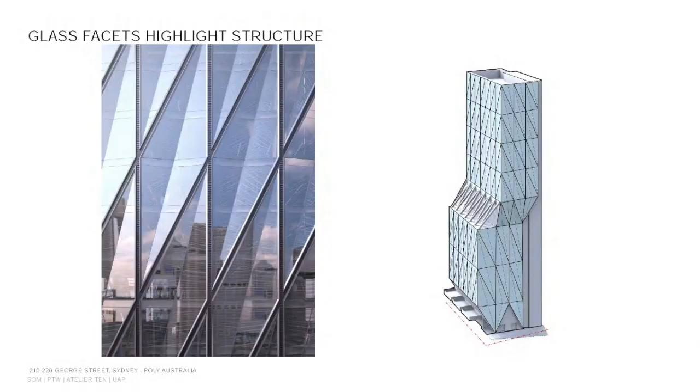So the faceted facade is the key idea of this building in terms of its external appearance - the ability to utilize the facets to create reflection, to create presence on the street, and particularly with that setback from Dalley Street, the building has more presence, more visibility. And of course, the structural system is expressed very clearly.

That structural system - there are many ways in which we can integrate high performance design, but in this case we were testing the idea of natural ventilation, which we know is not typical in Sydney for commercial office buildings. However, we were exploring that as an option.

So, a rendering - pretty self-evident in terms of its goals: to stand out, to do more with not much program or scale and height, and work very hard in terms of creating a presence on George Street with a very distinctive architectural and engineering solution.

Programmatically, I'll just keep going. It's an office building.

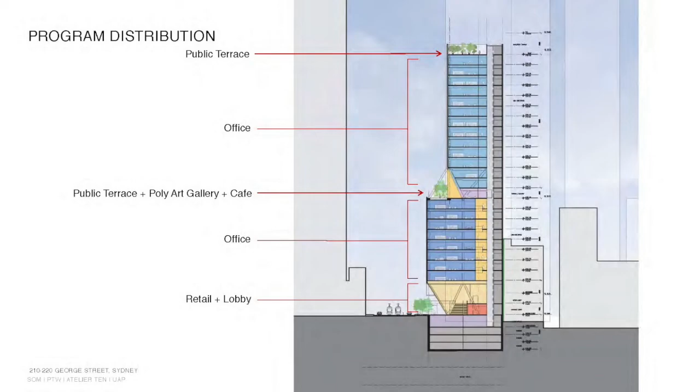This gives you a sort of compatible expression with the quite strong identity of the Grosvenor Place columns, the 200 George Street columns. There is something of a consistency in the way this building meets the ground relative to its context. I think the points have been made about the arrangement.

This is the ground level. We have the retail activation. We have the corner access. We have the attempt to activate Dalley Street.

And Michael's point - Dalley Street is a fairly desolate street. It should be much better. We thought this building had a role to play in trying to contribute to that, so we thought the potential to activate the corner was quite significant.

The stairs and escalators up to an upper lobby, this great room. The arrangement of the core is obviously close to the original planned core, and that's for good reason. The presentation of the building to the corner, the potential for works of art to be incorporated with that corner presence - most importantly, the charisma of the building in its context.

And Michael sort of touched on the expression of the facade. It is obviously quite an unusual expression, but it is a significant part of the George Street experience, as I said, and it warranted it.

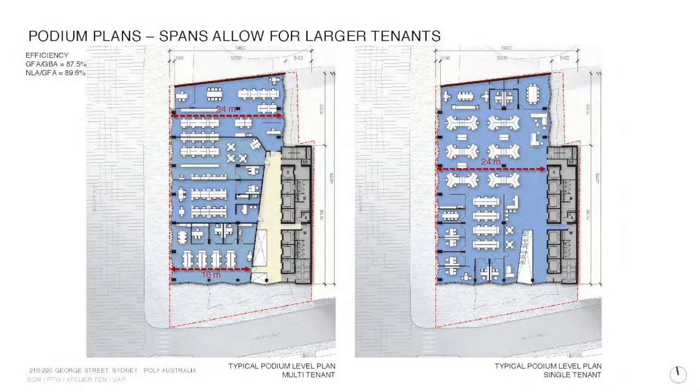The typical floor plates, the potential for interconnection, much of which has been addressed by previous presenters, and the character of the key public spaces.

So this is the space that I was referring to where Poly could house its travelling exhibition of ancient Chinese art. Particularly, Poly has a great investment in, I believe, bronze statues. Some of those were actually stolen by British and French collectors from the Summer Palace, and so Poly's trying to repatriate those pieces by purchasing them at auction, sending them back to China. But we felt that this space on the terrace level would become an opportunity to exhibit much of that, or some of that, of their collection.

So it's not a traditional cafe or restaurant - it's really a cultural destination, which is very much in line with Poly's values, core values.

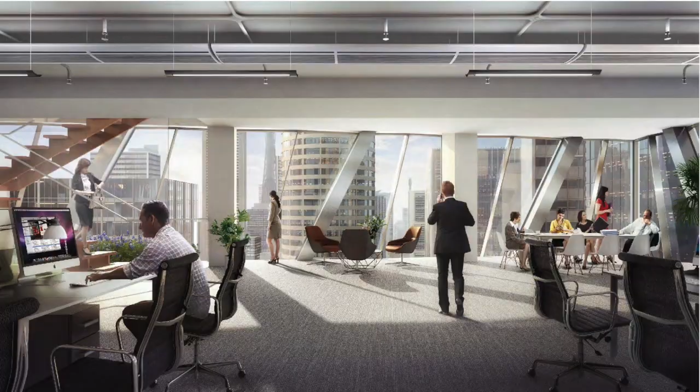Our approach to the synthesis of structure and architecture was pretty clear when it came to the internal spaces of the building - those diagonal braces of the structure being quite visible from within the building. This maybe seems counterintuitive because they could block views, or maybe screen light, which you want deeper into the floor plate.

But what we found through our work elsewhere is that these structural members actually add value to the rental space, and in some buildings - whether residential, like John Hancock in Chicago - add about 25% to the value of those apartments just by the apartment having visibility of the structure. So it's become an opportunity to add value to the building, whether it's commercial or other program.

Rooftop - yeah, another outdoor terrace with great views, screened and shielded from wind with a tall parapet.

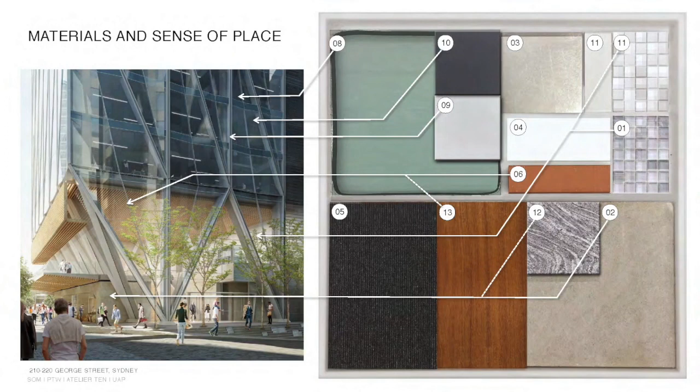Materiality was, of course, an important part of the design. Really, it's quite a simple concept: more warm, earthy materials at the podium level, and then more engineered materials on the upper floors. Some use of local sandstone, particularly in the lobby space at ground level.

So I think this is our final slide. This is our scheme - tries to stand out, create presence, create identity for this important area of Sydney. Tries to work with as much as it can in terms of creating something that would stand the test of time and provide a legacy for Poly Group.